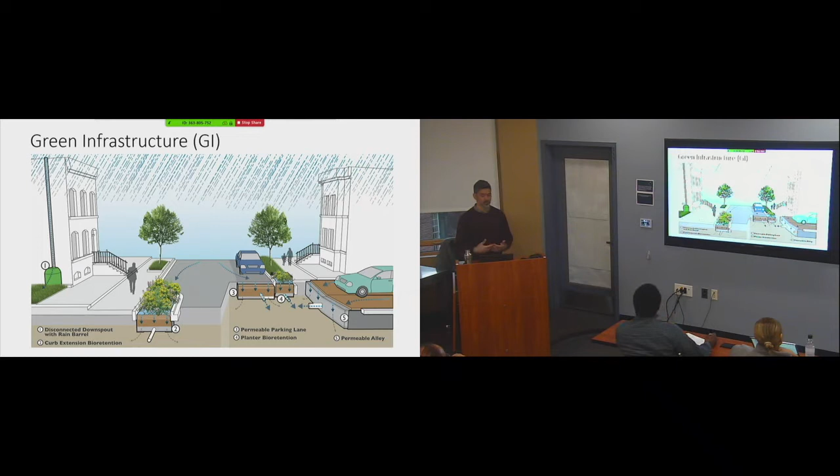So why all this shift to green infrastructure? Well, you probably heard of the triple bottom line approach. It's really about getting the added benefits. And if we think about large storage volumes or retention, the antithesis, which is gray infrastructure, you're not getting all these added benefits. We're not getting improved habitat or carbon sequestration. We're not getting community health benefits. So this is really the reason we're pushing green infrastructure, and so many communities have been including it in not only water quality improvement projects, but also water quantity improvement.

So in urban areas like this area, New York City, we have combined sewers, and really what that is, when it rains, we don't have a separate storm system. Our sanitary and our storm are in one combined pipe. And so what happens is the runoff during rain events combines with the sewage from our waste stream, which is toilets, showers, sinks, everything you can put down the drain. And we've designed the system to overflow into the water bodies. We do that because the alternative is when it gets at capacity, it would back up into basements. And that's a much worse public health effect.

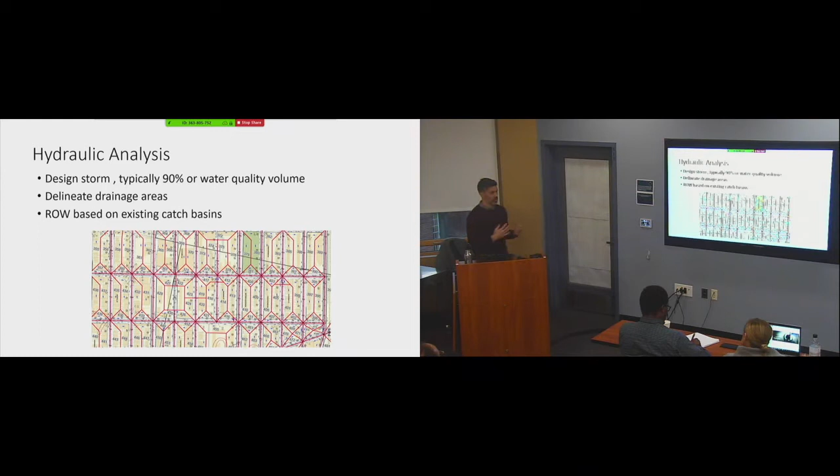So if this is the drainage area, if we put a practice here, its drainage area is only going to be this big. We really want to get it close to the catch basin. You want to capture that water before it gets into the catch basin. So that is really important, and that really is what drives the placement of your practice if you're doing it within the right-of-way or anywhere else: thinking about the drainage area and where that practice is taking that water from, because we want to maximize the amount of drainage area and runoff that we can get.

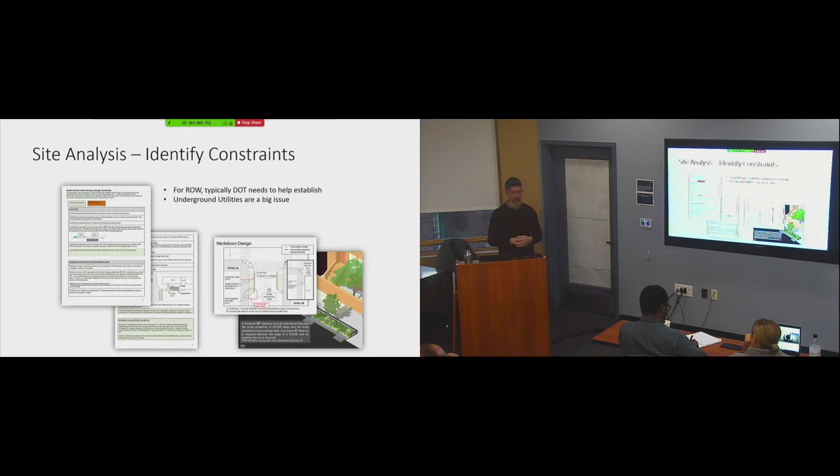And then we have constraints. We're retrofitting in the right-of-way. We're thinking in the context of urban environments. We have a lot of clearances to think about. We call them offsets, setbacks, clearances, whatever you want to call them. It's about making sure we're a safe distance away from a driveway. Do we have enough sidewalk clearance that we're leaving for ADA requirements, and all those different kinds of urban design aspects we need to think about, especially ahead of time if we're rolling out a program, and what those impacts are.

So infiltration requires good soils. We really want to know what's happening underground. Each one of these practices usually has a permeability test as well as a soil boring done for each location. So that's a consideration that needs to be made in terms of getting that information.

What we're trying to do is relieve it from the system. These systems can be designed with underdrains if the soils are poor. You'll get some peak shaving on your hydrograph of the peak flow, but you're not going to infiltrate 100% of the flow. So what we really want are good soils, but if we don't have them, we can modify our design to allow for a practice to still provide that peak flow shaving.

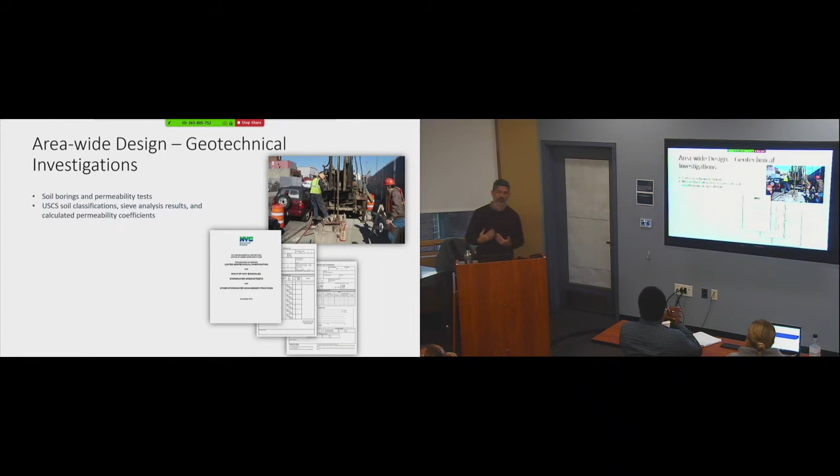Before I get in too much further, whoever wants to ask a question, we don't have to go back. We can stop, and please make this an open forum. If anyone has a question, please raise your hand and we'll stop and discuss it.

So one of the things I talked about, some of the tools: if you're really going to get a big impact or a large city, you're going to have multiple practices. So Hoboken, I don't know how many they have, but New York City has probably 5,000 rain gardens in the ground right now. These are going to be highly distributed. They're not going to be this large end-of-pipe gray infrastructure control. So to get that impact, you're going to have to do these in many different places.

And you want some consistency of design. And I think a lot of cities come up with standard details. And so that allows that consistency to happen. It allows them to do projects quickly. Otherwise, imagine 100 design contracts trying to be reviewed in a small department. If you have standard details, it's really going to help keep your program going, minimize the work, and make sure you have consistency across all projects.

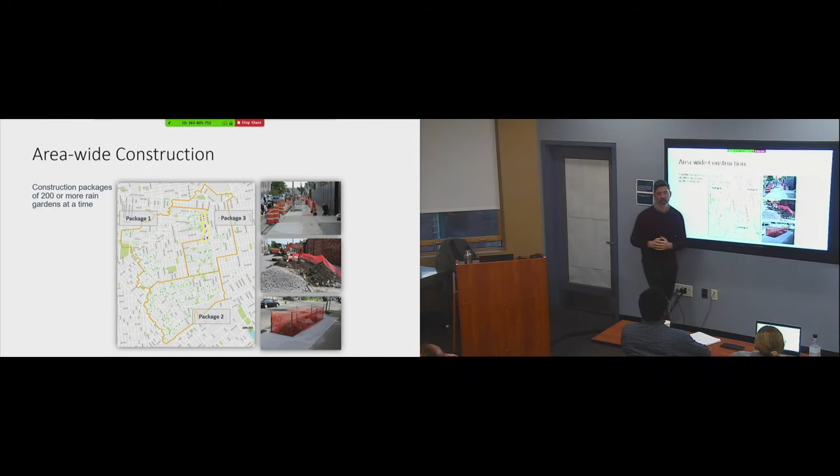But in general, one rain garden is not going to handle the entire block. So you have to have multiple in series. And you don't want these things too long, because we want to give people access. We don't want to have them walking and not being able to get off the sidewalk. So that's the reason why we have a maximum length. But that's a good observation. But you can see how many distributed rain gardens you need just within a neighborhood.

Another question? Yeah, so are all these rain gardens exactly the same almost, or are they all different in slight ways? There's some variations. I mean, New York City, for example, wanted a lot of consistency. They worked on that standard detail.

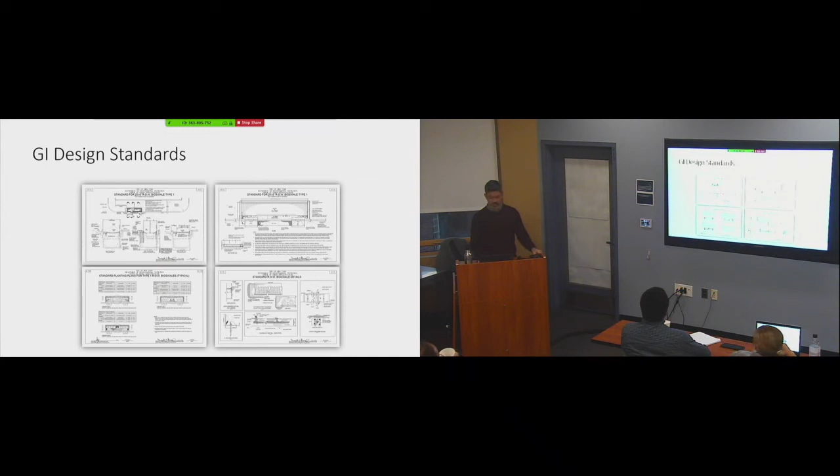They worked on that standard detail for 2 years. And the reason it took them that long is it's not just DEP who's responsible for the stormwater or the CSO plan. It's Parks Department who is responsible for vegetation. It's DOT who owns the right of way. Everyone has a stake in the game, and it took a long time for everyone to come to the table and say, okay, this is what it should look like. So,

and I think a lot of municipalities have found if you don't have any standard details, you're going to leave it up to the designer, and then you're just going to have apples over here and oranges over here, and it's going to be hard to maintain. And while I think this limits some of that creativity that might be available out there, it really helps if you're trying to do this on a large scale. So I think they've spent probably about 800 million on these 5,000 rain gardens. So there's a big investment of public dollars, and they want to make sure they're performing right. Right. What is the objective on? I'm sorry. Is there a question?

Yeah, I just wanted to know, for older sections of the city where you may encounter underground storage tanks or old utility lines, is there sort of that contingency placed into the project when you are scoping it out in the city? Yeah, as much as that information you can bring up front as a constraint, we actually do a constraints analysis, and those are the types of layers or data that we try to collect and plot in GIS to stay away from. Okay, so like a red highlighted area, like a hot spot, exactly.

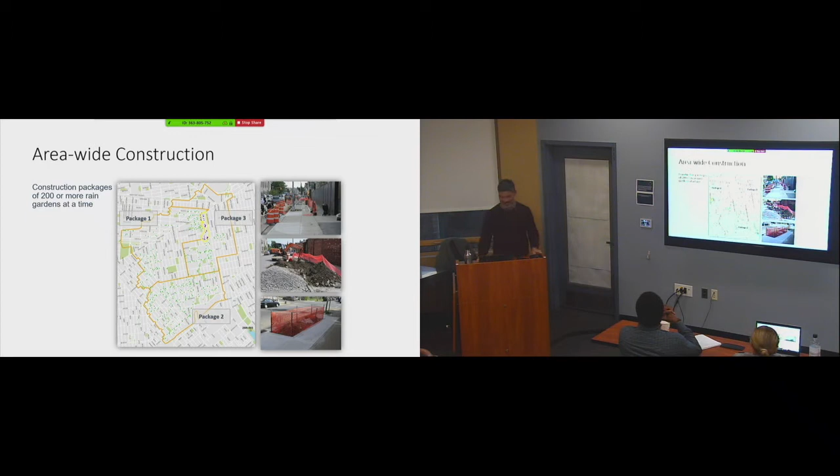Maintenance is really important. It's one of the big topics, and one of the reasons why I think a lot of municipalities are hesitant to pick up on these practices, because they're highly distributed. They do take different types of maintenance. A lot of it is just keeping things clean, vegetation, normal pruning and plant replacement. What New York City does is they built up their catch basin cleaning crews, because they're already at these locations driving around. They're already assigned to a specific area, and they just train them to know how to take care of plants instead of just sucking out catch basins.

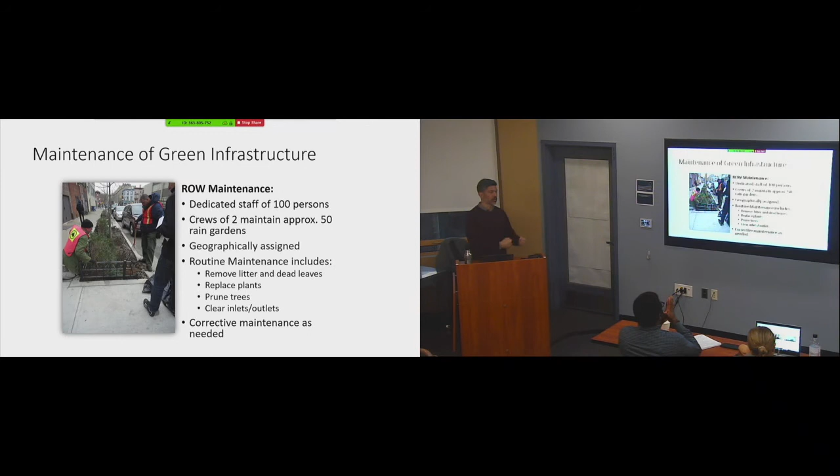And then asset management is really important. When you start getting more of these systems, you've got to keep track of them like any other asset. So having a database of your 1,000 different assets and having information associated with that, usually geographically, spatially, in some GIS program where you can access that geospatially.

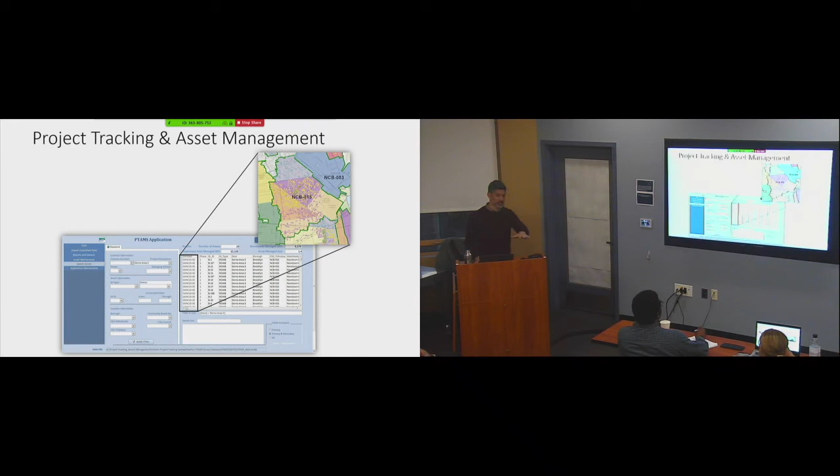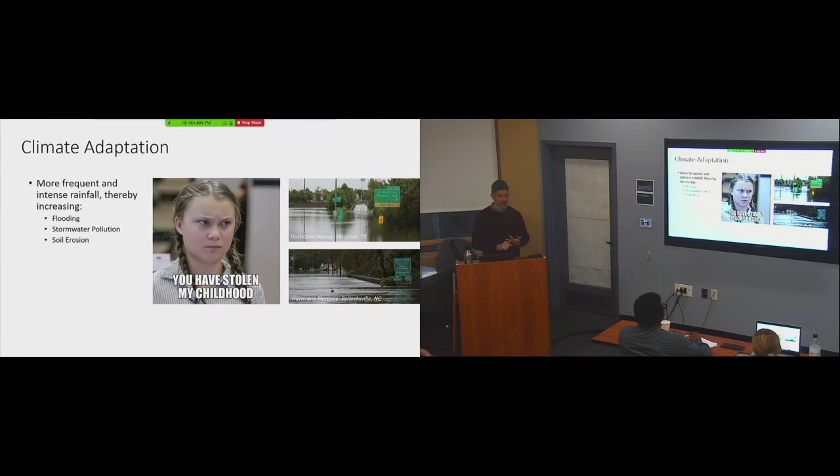Can you go back to the previous slide? So I would assume that more evapotranspiration means more potential rainfall. So how do you handle that, I guess you would say, trade-off?

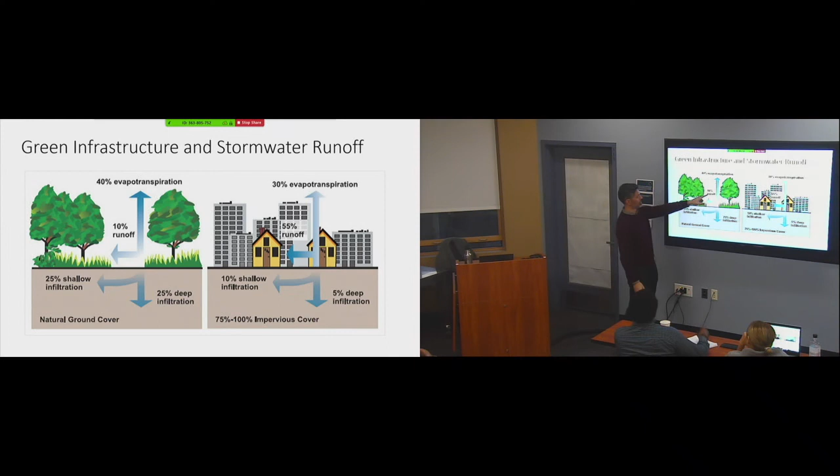I think if you were to compare these volumes, even though this is 40%, it's not the total volume of water. This is going to be a very small amount, where this is going to be a large amount of water. So we really care about the runoff, I think, in terms of flood abatement and water quality control. I don't know a lot of studies that have been done on evapotranspiration of retrofitted green infrastructure versus existing imperviousness.

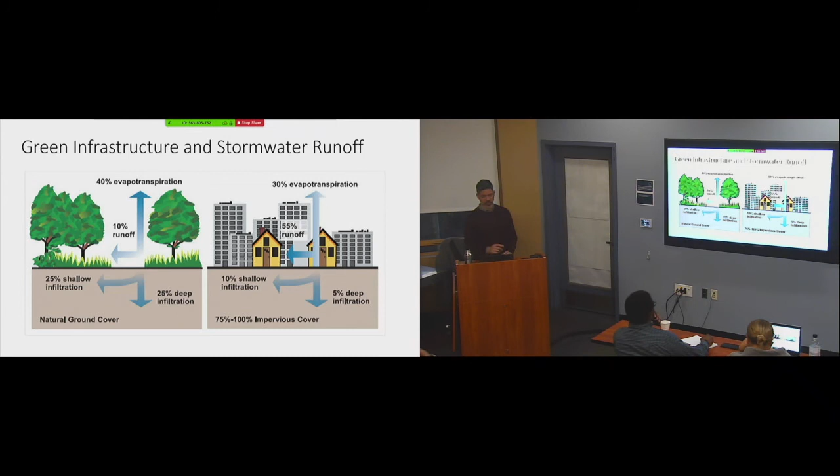Is it always true that it's an increase in evapotranspiration, or sometimes there is a decrease in evapotranspiration? I'm not sure. Yeah, he has to finish first, and then we can get back to this. Yeah, I'm not sure. It's a good question, and definitely food for thought.

So I'll go into this DC practice. The lesson learned here is really just about modifying designs to get higher design storms, larger conveyance. So this particular plan and cross section is a bioretention facility, and one of the things about this project is the long-term solution was part of a larger tunnel system. And so the ultimate reduction in volume and really the fix was about 10 years away.

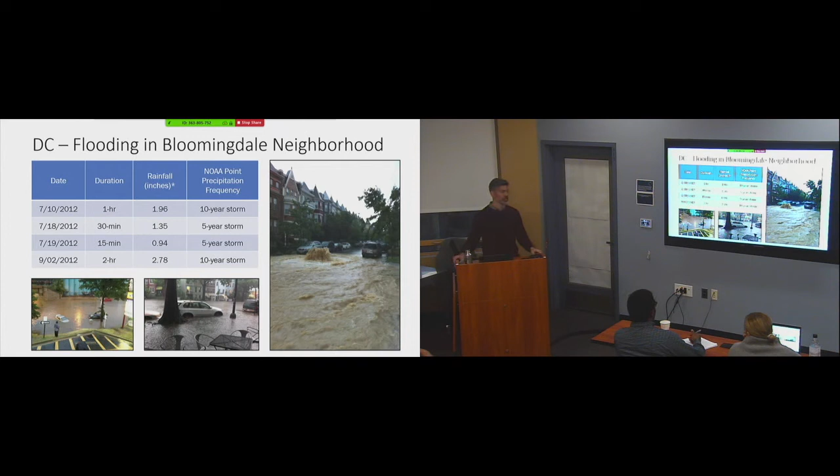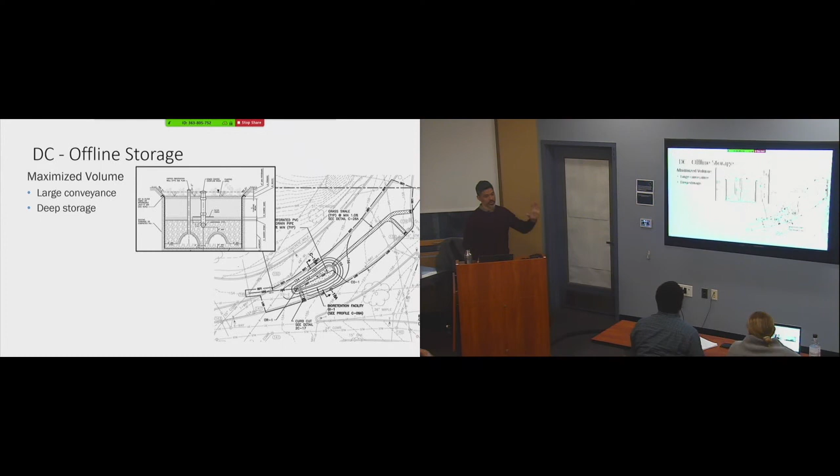But these residences, if you saw earlier, they swept up all the combined sewer in their basement. They probably had to buy new appliances, and then it happened a week later. It was a huge political issue for the city. So they needed a quicker fix, and they were able to do these large bioretention green infrastructure practices within the right-of-way and modify their designs to take these bigger storms.

And really, it was about making a lot of the conveyance wider, making the storage a lot deeper. This is 15 feet. You can see these are pretty large facilities that can handle much more than what's traditionally looked at for water quality. So there are ways to modify the design.

Another project in Boston, this is a stormwater detention project. I still think of it as green infrastructure because there are some natural systems that we're looking for. But Boston has a lot of low-lying areas. It's like New York, like Hoboken, it's near open water, the bays and the ocean.

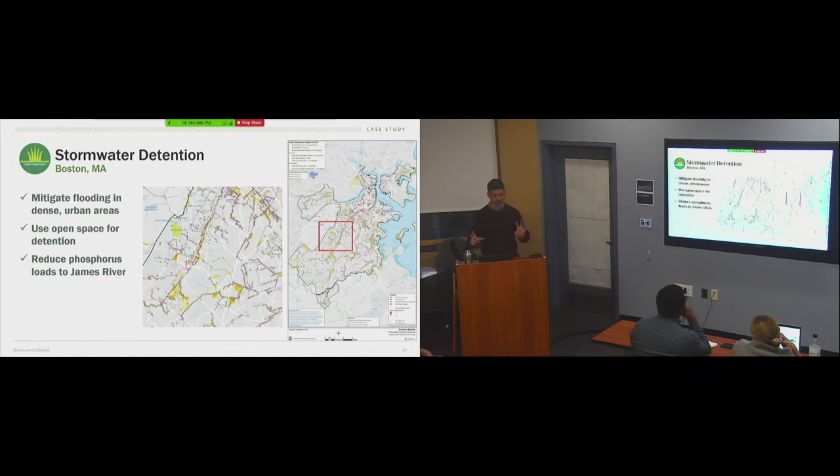So they do have a lot of low-lying areas, and they also have a phosphorus issue within the James River that they need to address. So they're trying to look at water quality as well as water quantity. That's two of their goals for this particular project that we're doing.

So we used, I know you can't see a lot of this, but basically we were looking for areas within Boston that were park space where we could temporarily flood it when there are large events. This is kind of like a temporary detention, using wetlands or structures. And really, we just came up with a site assessment process that worked with the community.

The other project I wanted to go over is in Atlanta. They're doing a lot of green infrastructure, and they're looking at some interesting detention because they have some pretty major flooding problems within their collection system. These are not just flash floods, they are low-lying areas that get flooded frequently, for many different reasons, a lot of it is just capacity. So how do we use natural systems?

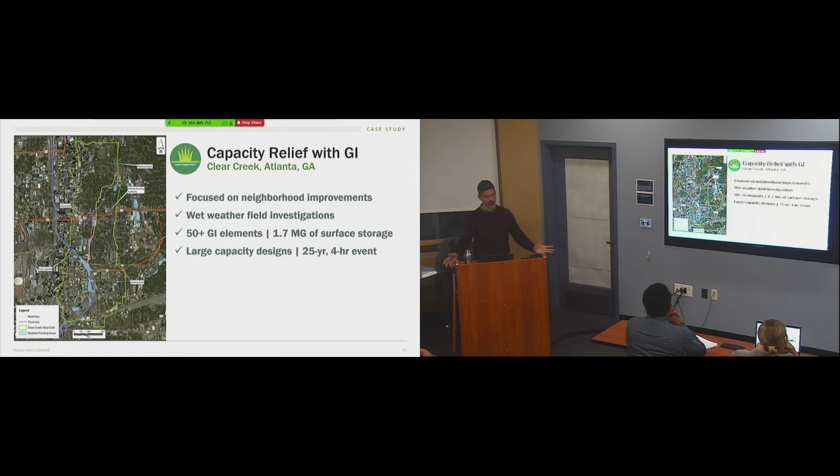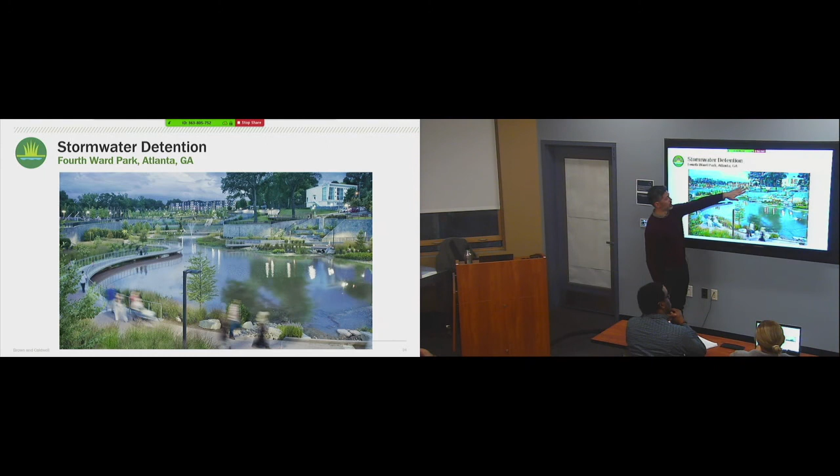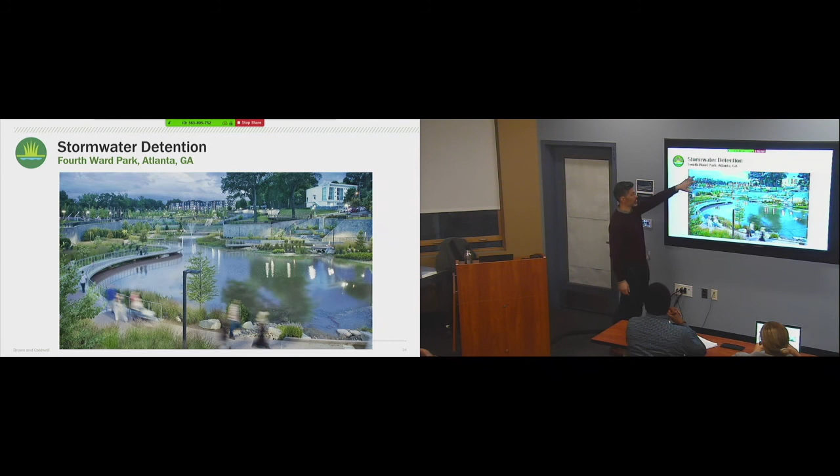Well, this is an actual project, an area called Fourth Ward. This is a detention basin that is a pond at normal operating levels, and when larger storm events come, they close the gates and it fills up much higher. So they excavated a large area, and this is very close to downtown. I can tell you this neighborhood was pretty—there wasn't a lot going on, there needed to be a lot of improvement. And now they've built all kinds of things, it's drawn a lot of residences and brought the neighborhood back around the stormwater park. So really great project. It just shows that you can do flooding of park spaces and have it as an amenity.

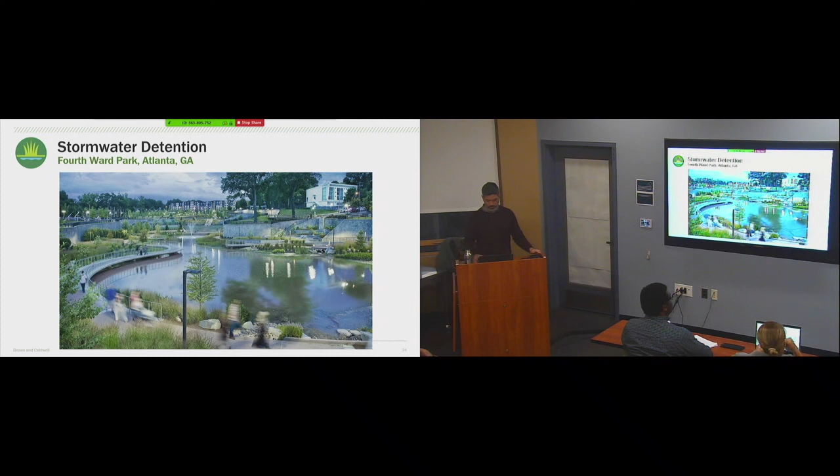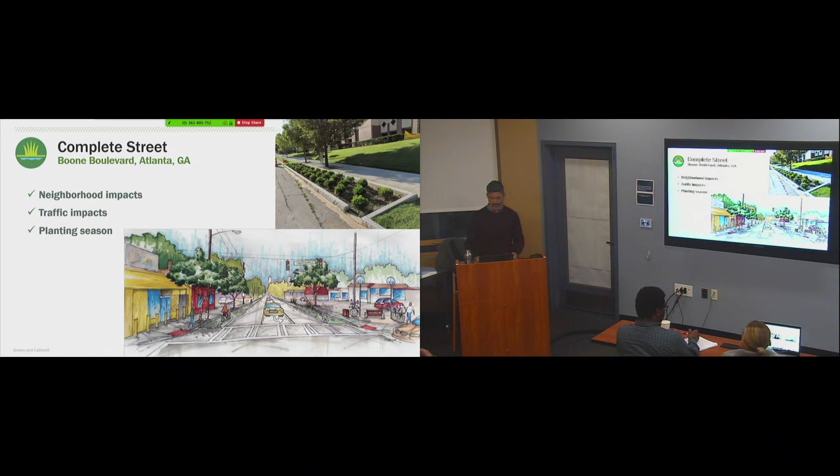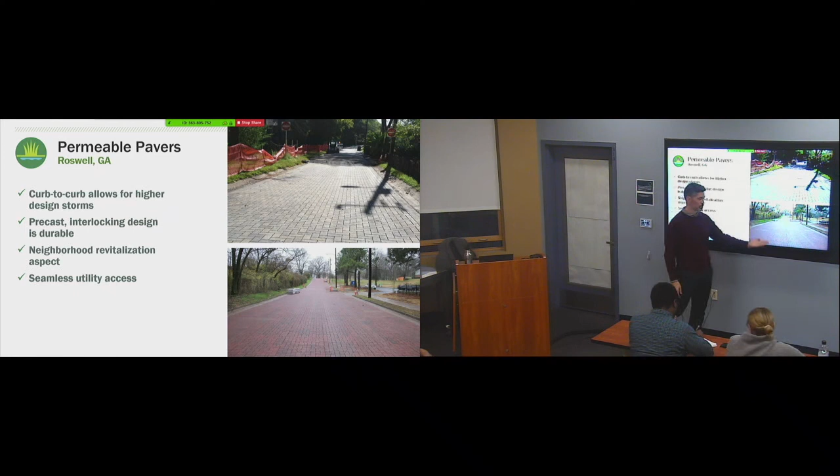There are some studies out there, look for them, but I think biofiltration is going to be the best, and that's why usually when we're looking at water quality treatment, we think about bioretention and bioswales as the first line of defense, because it gives the most amount of treatment.

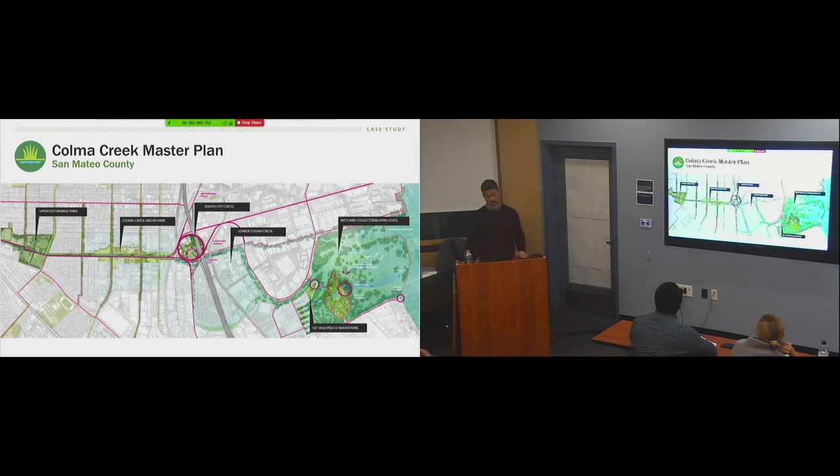I'm going to breeze through these. This is in San Mateo County, cool project. This is still under design, but you can see we're using this beautiful creekway to do park improvements and allow for flooding.

A lot of this is done through modeling and looking at your collection system model. We use SWMM InfoWorks—I don't know if you guys are familiar with these programs, but they're pretty powerful. They take a lot of time to build, but once you build them, you can run all kinds of scenarios through them, and that gives you the volume reduction you need.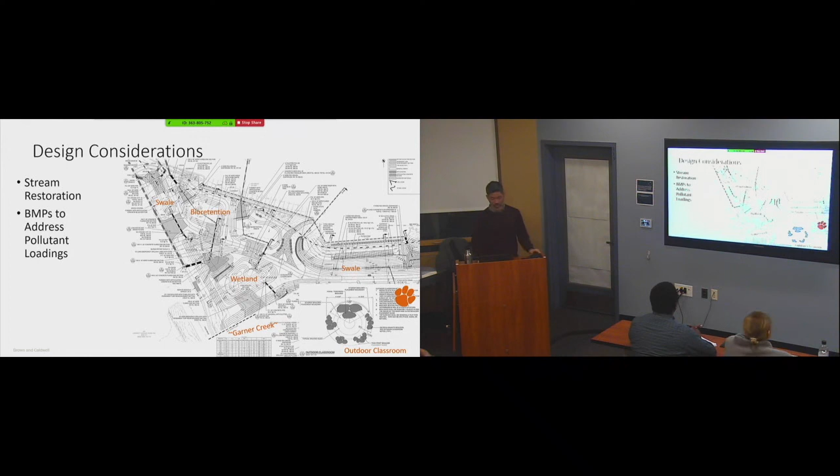This is kind of hard to see, but there were green infrastructure elements within that stream bed that we created to manage a lot of the runoff coming from a very highly impervious parking lot of the school, and we worked with the school to get input on the design.

It's really important to make sure that when you're doing these projects you think about the community, because we're not just doing a storage tank underground. There's a lot of real opportunity to get people involved, get them educated, and that's just a message I want to take away from this.

The takeaways here are that green infrastructure can be designed to really provide that capacity relief. We're not talking about stopping sea level rise—there's some carbon sequestration we're going to have, but it's not going to change the global climate. But we can address localized flooding issues and really provide that capacity relief so that when we do get another Sandy, the impacts within the collection system where we live are going to be less, and it's really going to reduce the impact of flooding.

So you can modify these designs. Most of them I talked about are about that 1-inch storm, but you can really bump up the design storm. Traditionally we're at like a 1-year storm event, but you can go up to 25, maybe even 50-year storm events if you upsize a lot of these facilities. And think about regional detention, like that Boston project.